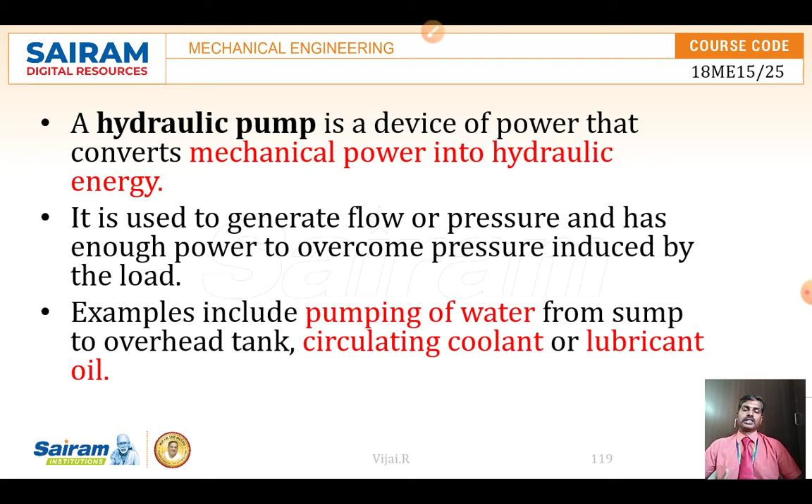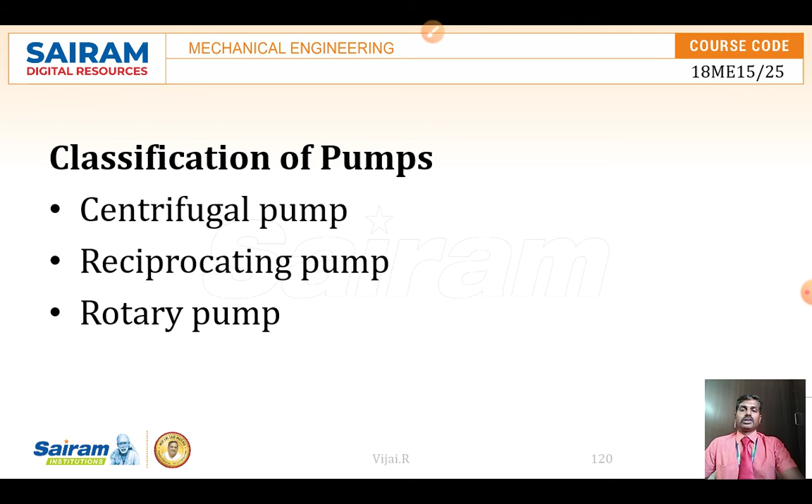And the lubricant oil. In all types of components we want to lubricate, we need a special pump and injection pump. So pumps are there for conversion of mechanical energy into hydraulic energy. There are two or three different types of pumps we are going to see here: a centrifugal pump, a reciprocating pump and a rotary pump. The difference between centrifugal pump and reciprocating pump we will see in the next videos.

Before going to that, the specification. If you want to purchase a pump, the main specification required is maximum discharge pressure, how much pressure it can withstand. Each and every pump is designed for a particular pressure, so that is a very important specification. And how much liquid, oil, water or fluid, it can deliver. That is the maximum discharge flow, how much it can discharge per period of time.

And the size of the pump, and features like what type of pump it is, a centrifugal pump, a reciprocating piston pump or a gear pump. The power source, whether it is an AC source or DC source pump or hydraulic pump, these are the specifications.

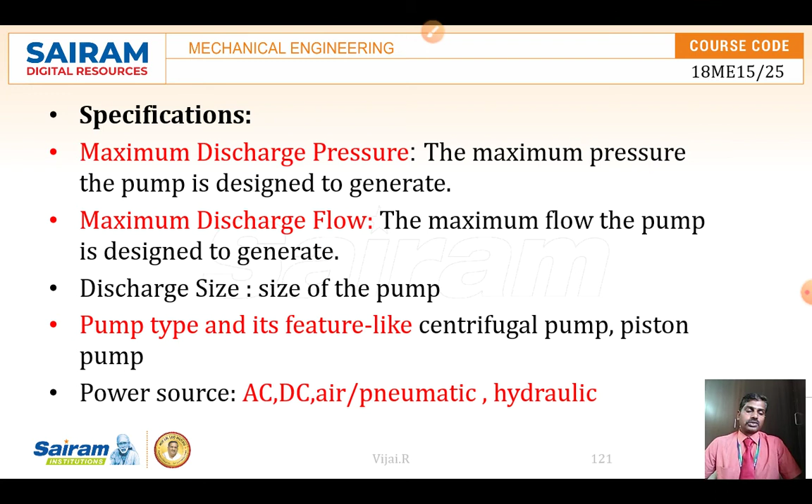Now we are coming to one of the classifications, the reciprocating pump. What is the function of the pump and its working principle, we are going to see. A reciprocating pump is a hydraulic machine which converts mechanical energy into hydraulic energy. Normally for all pumps the principle is the same. In this reciprocating pump, the piston sucks the liquid from a container or tank due to vacuum creation, and then it delivers it through a force, with the help of a reciprocating piston.

So the pump contains a cylinder, just like our syringe, how we suck the injection through the nozzle of the needle and then deliver it by pressing the piston. The piston moves inside the cylinder; we call it a positive displacement pump, which consists of a piston or a plunger. The piston is present inside the cylinder. It is used in a place where a small amount of water is to be discharged.

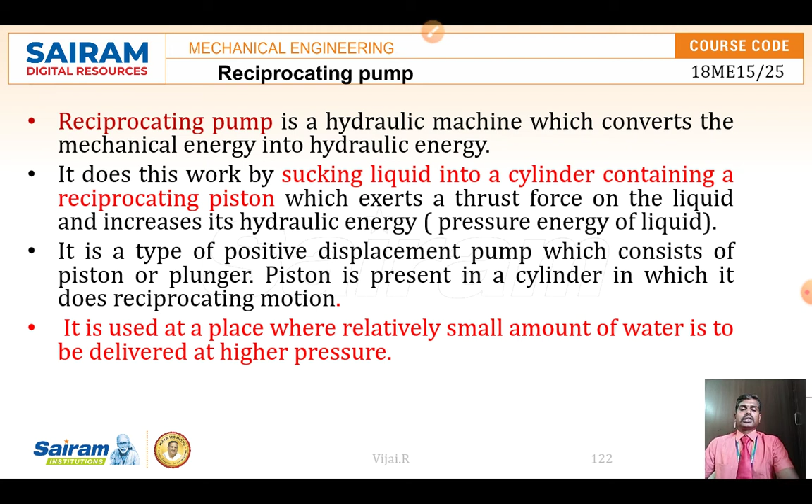So the piston movement and how it is delivered, we will see in this sketch, how the reciprocating pump functions. Normally at the bottom, imagine there is a submerged receiver tank. It is a tank which contains the water, and there is the suction pipe, which is going to suck the water.

And here you can see a cylinder, and in the cylinder a piston is there, and the piston is connected with a connecting rod and a crankshaft. So just like in IC engines, how the piston movement is connected with the crankshaft, here we are connecting with the motor.

When the electrical motor rotates, the crank which is connected with the motor pushes and pulls the piston. To and fro motion of the piston can be caused with the help of the rotation, and inside the cylinder a vacuum is getting created. When the motor rotates half of this, it will create the suction, and the water is getting sucked inside.

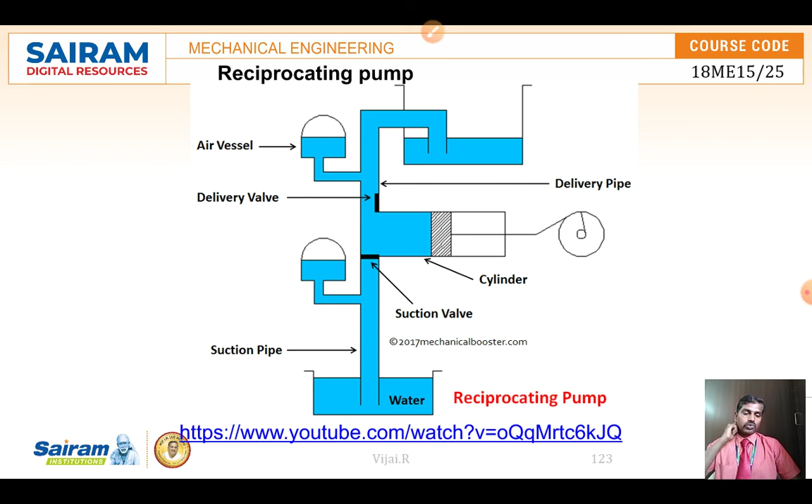So you can see here the important parts of this are the cylinder with a piston and the piston rod, connecting rod and a crank. As in the case of IC engines, here also the same thing, but it is connected with a suction pipe and a delivery pipe. The function of the suction pipe is to suck the water. So there is a suction valve and a delivery valve. The suction valve opens, and the water gets in through the suction valve.

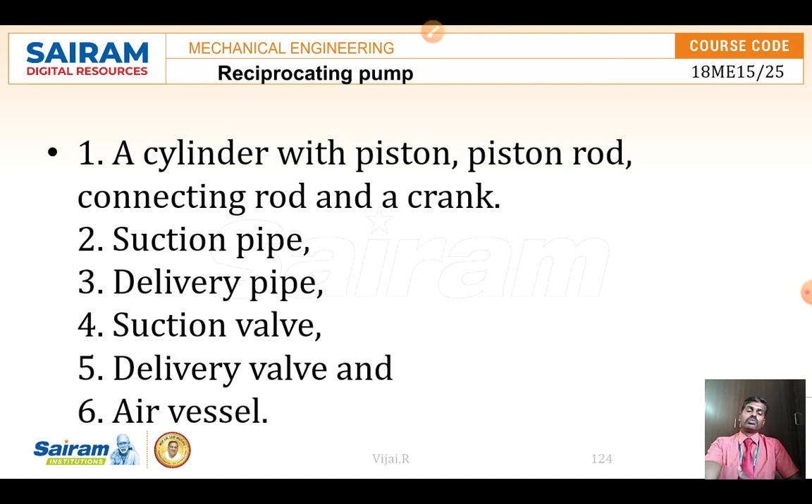Let me see one by one what will happen when the piston moves towards and away from this. Here we are having a cylinder with a piston, and the piston rod is connected with the connecting rod and the crank. When the crankshaft is rotated, the crankshaft which is connected moves and pulls the piston backwards, towards the right side.

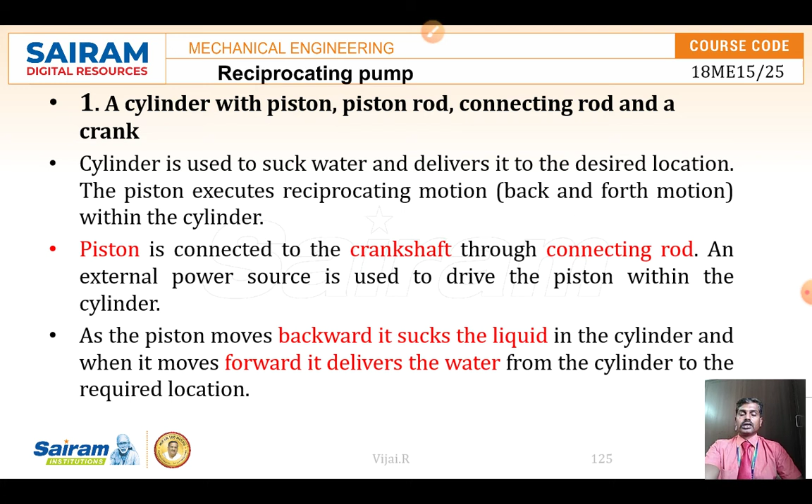So when the piston moves backward towards the crank side, it creates a vacuum inside, and the suction valve opens up. When the suction valve opens up, the water enters into the cylinder, and when the piston moves to the dead end, the total suction has taken place. And when the crank is rotated in the second half, the piston moves forward, and the suction valve gets closed, and the delivery valve gets open.

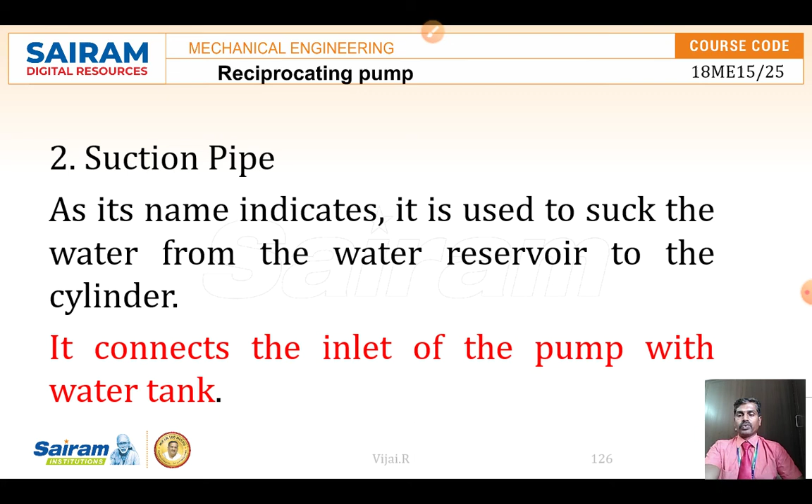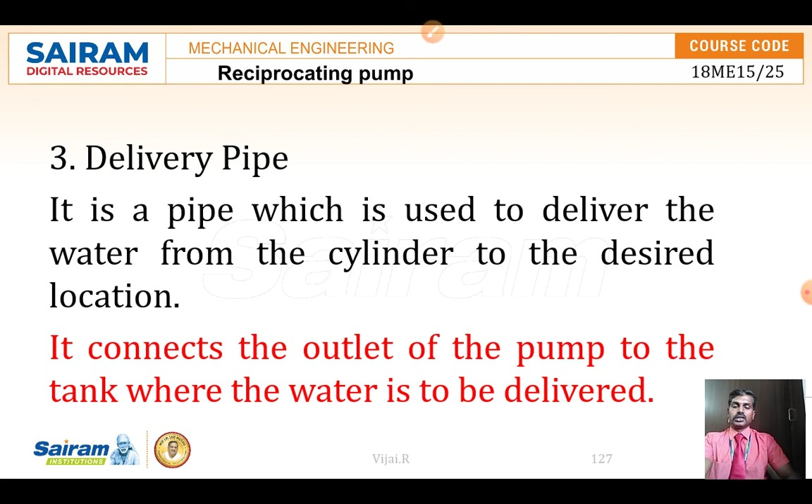So the suction pipe is connected to the inlet of the pump where the water tank is there. When the piston moves this side, it sucks the water, and now the piston moves towards the cylinder head from the crankshaft. The delivery pipe is connected for delivering water, so it is the output line, and the delivery pipe and the cylinder are connected with a valve which is called the delivery valve. The delivery valve opens and sends the liquid out due to the compression of the piston, and remains closed when the water is sucked in.

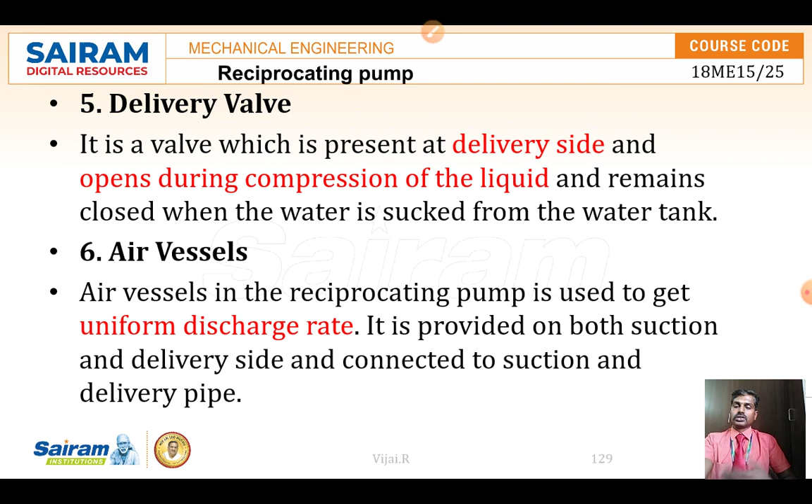So the delivery valve and suction valve are most important for the suction and delivery of water. The air vessels are used for the discharge of water, and this is how a single acting reciprocating pump is going to operate. During the suction stroke, the piston moves backward, the suction valve opens, and the water enters into the cylinder. After the completion of the suction stroke, the suction valve closes, then the piston moves towards the head. Then the delivery valve gets open, and through the delivery pipe the water gets out.

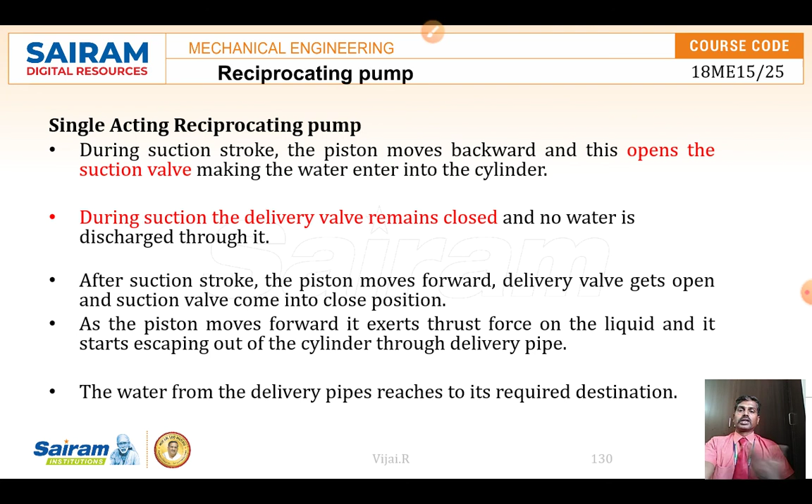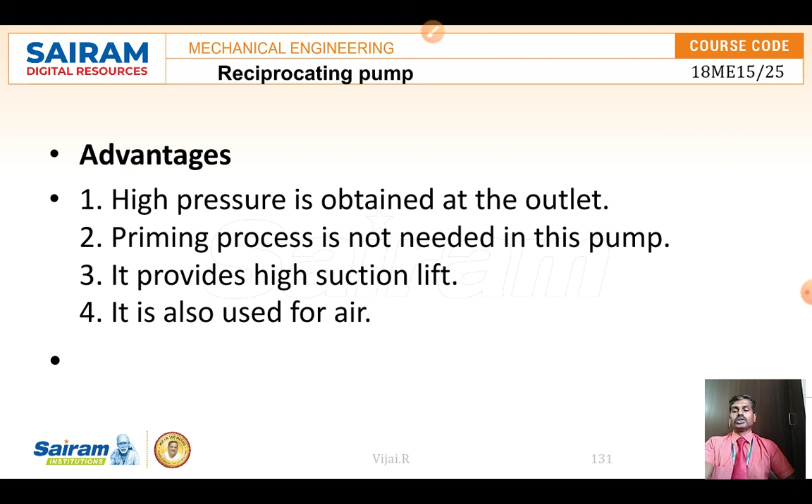So this is how in the reciprocating pump, the forward and backward movement of the piston sucks the water and delivers the water. The advantage is that the priming process, which is needed in the centrifugal type, is not required here. We will see what that is in the next video on the centrifugal pump. And it produces high suction lift, so it is used for both hydraulic and pneumatic types of pumps.

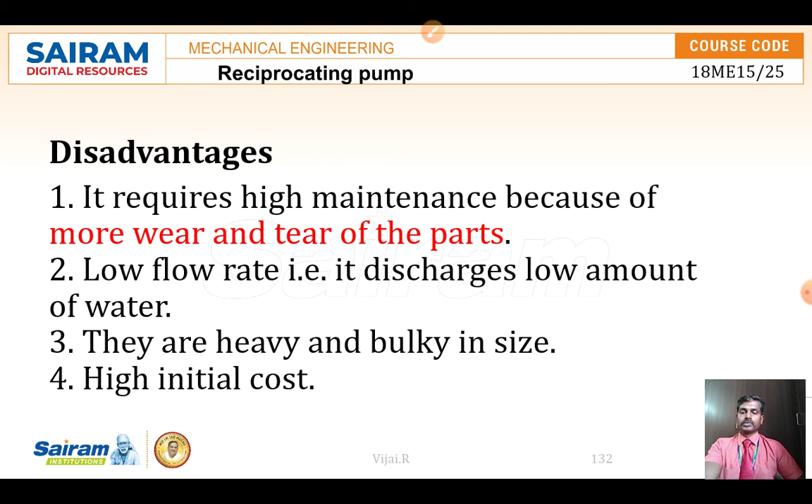Its disadvantages: maintenance will be more because of wear and tear, since the piston rubs along the cylinder frequently. The flow rate will be lower, and it is heavy and bulky in size. The applications are low discharge rate and delivering water at a high level. It is used for bicycle tire inflation, and compressors work under the principle of the reciprocating motion.

So this is the information about the reciprocating pump. In the next class we will see about the centrifugal pump.